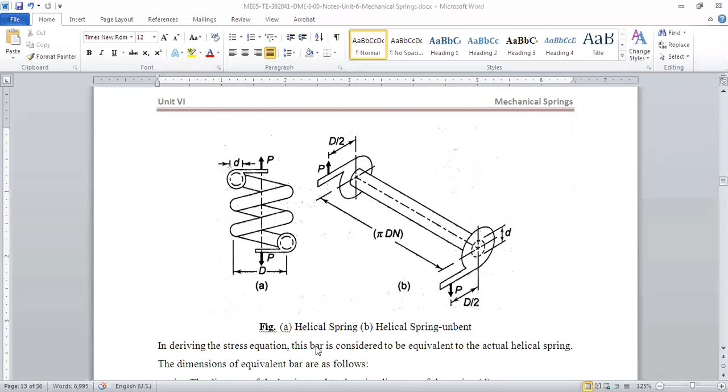So last time I think we left at different lengths, it was kind of explained in a quick manner - I explained basically the lengths of the first spring. Today we'll go through the lengths of springs and also the styles of the end. This is important to understand, and then we'll start with the equation of the spring.

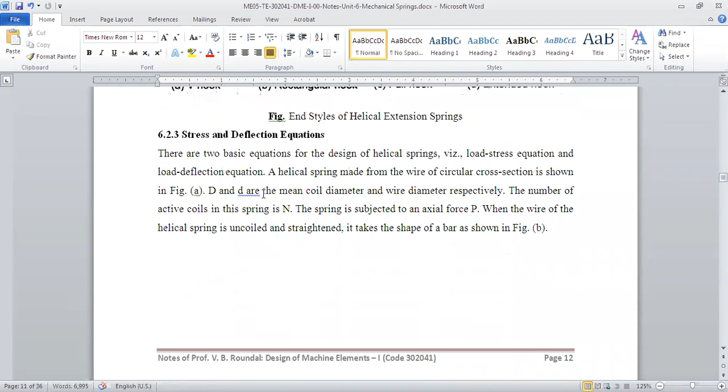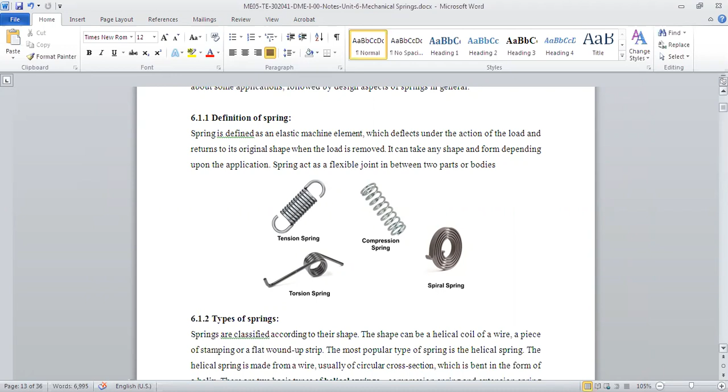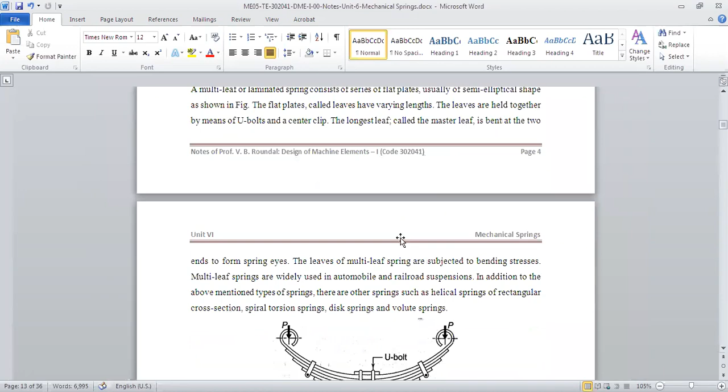As I said, this is the second lecture, and in the last lecture we have gone through what is a spring, why a spring is required, and what are the different types of springs, different types of ends in helical compression and extension springs. They have different purposes, like helical torsion and leaf spring, different functions depending on the applications we have seen for the spring, and some materials used for the spring.

So today - important factor we have learned yesterday - spring index is the ratio of diameter D by d, right?

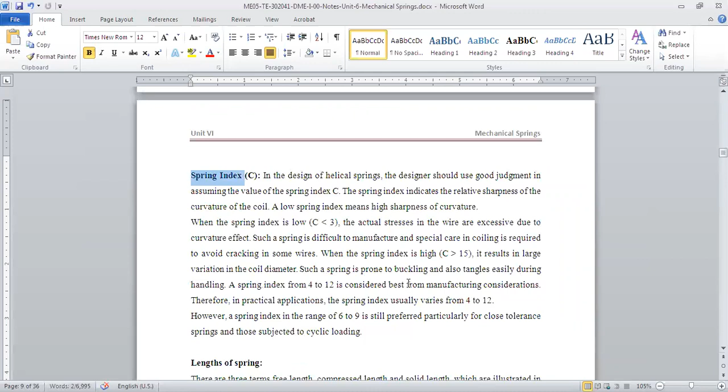Now we'll go through the lengths of the spring. What are the different lengths of the spring? As I said, if we take any spring - like this is a normal helical spring - it may be a tension spring or compression spring, depending on the application.

So if you take the spring, if there is no load on the spring - compressive or tensile, any load - then this length, like the example we are taking is a compression spring, if the load is not there, that length of the spring, total length, is called the free length, right?

When you put a load, the maximum load which you can put on the spring, at that time, the length of the spring after the compression, after the maximum allowable compression, is called the compressed length.

And the length when the spring is in such a form that all the coils are touching each other - so if you put any more load, then the load will not be taken by the spring in a torsion form, but it is taken in a direct compressive way, like it will be like a solid kind of cylinder, and the load will be taken by the coils as a direct load. So this solid length is basically when all the coils are touching.

So if you look closely at these different lengths, the solid length is basically: if d is the diameter of the wire, then diameter of the wire into number of coils will give you your solid length. So this gives you: nt is the number of coils, d is the diameter of the wire.

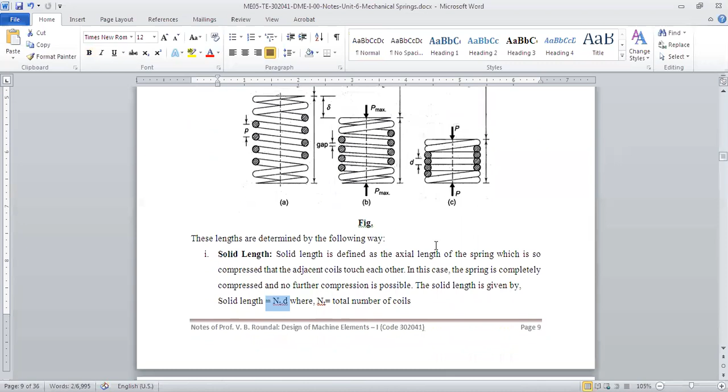Now compressed length means when there is a maximum allowable load, so maximum allowable deflection is there - delta. So solid length plus total gap will give you the compressed length. So basically free length minus delta. So what is this delta? Delta is the maximum allowable deflection.

So if we know this delta, then we can find out - basically what we are trying to say here is that each and every coil must have some kind of gap in between. Why? Because if the coils touch each other, the load will be taken directly by the coil in a direct way, and we do not want that. We want the spring to take the load, right?

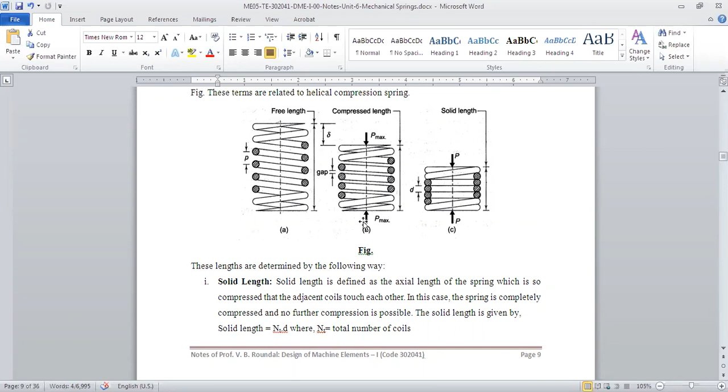So because of that, what is the gap? Total gap is basically nt minus 1 into the gap between adjacent coils. So if the gap between adjacent coils is x, then total gap is x into nt minus 1. Now why minus 1? Because there are top and bottom coils, there will be only one gap, right? So nt minus 1 into gap between adjacent coil will be the total gap.

Now, free length minus this delta will give you the compressed length. Okay, or you can say this is solid length plus gap between each coil, multiplied by nt minus 1. So this is the total gap. So solid length plus total gap will give you the compressed length, and compressed length plus delta will give you the free length.

Free length is equal to compressed length plus delta, so it is solid length plus total gap plus delta, right? This is solid length plus total gap we calculated - gap between two adjacent coils multiplied by nt minus 1, plus delta, will give you the free length.

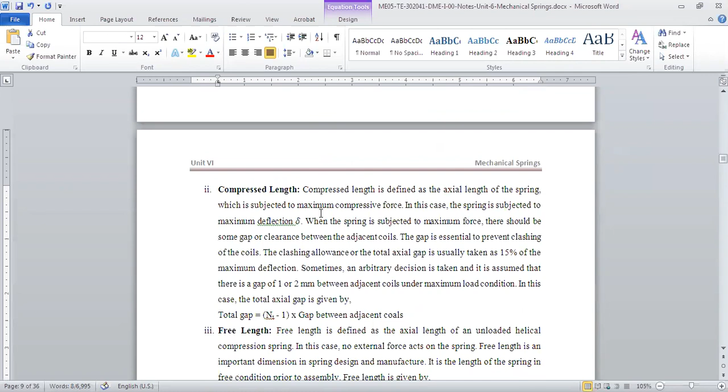Now what is the pitch? Pitch, like in threads, is the distance between two successive or two adjacent coils. So if we know the free length, when the coil is not having any load, that length upon nt minus 1. Again, why are we taking nt minus 1? Just hold on.

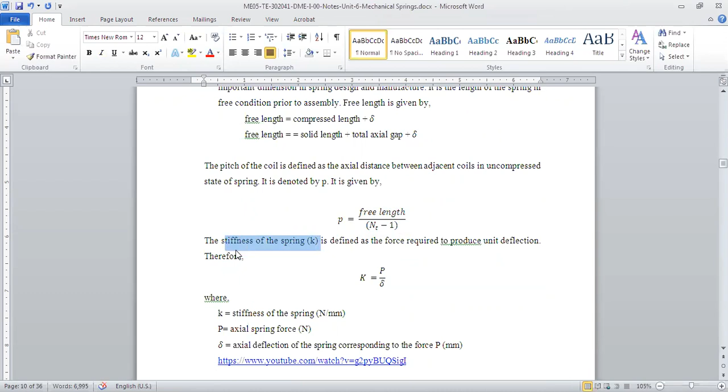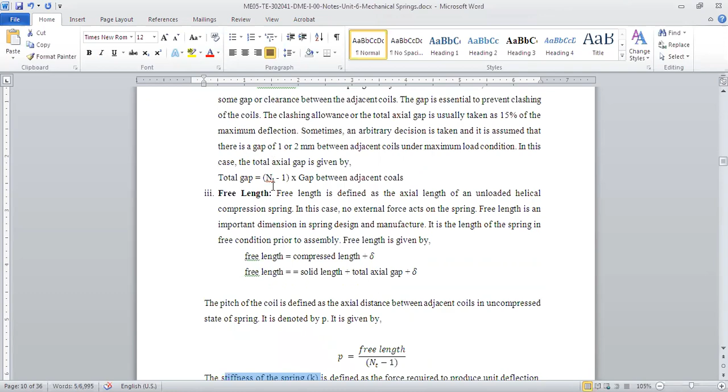Now an important characteristic of a spring is called stiffness of the spring. This is the most important characteristic. What is stiffness? When we put a load on a spring, if the load is P, and because of that load the deflection is delta. So if you take this spring and put some load, it will be deflected. If you put more load, it will be more deflected.

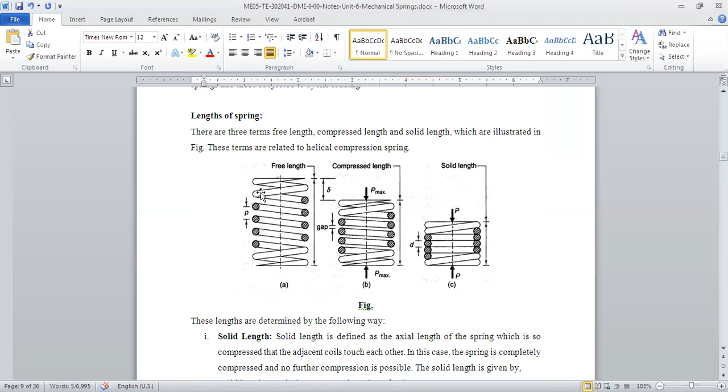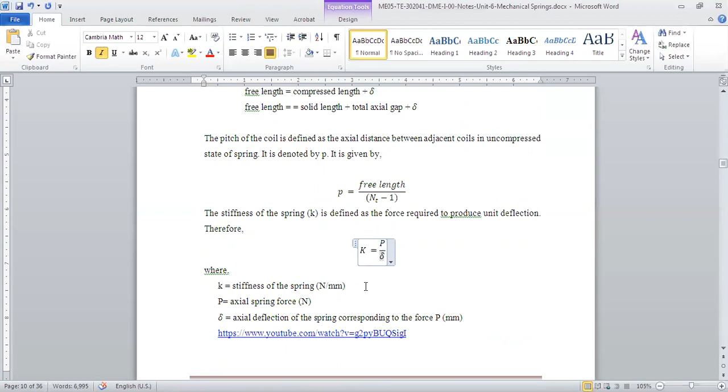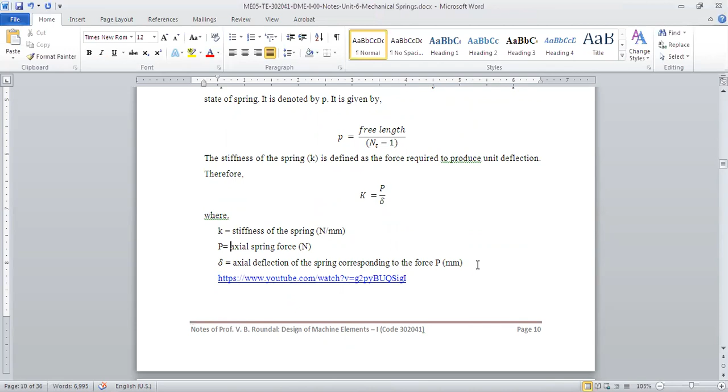So for a spring, this deflection is proportional to the load, or load is proportional to deflection, and that constant of proportionality is called stiffness. So stiffness is equal to load upon deflection. If P is the load in Newtons and deflection is in mm, then Newton per mm is the stiffness. So stiffness is when we put load on a spring, it gets deflected, and the ratio of load upon deflection is called stiffness of the spring.

There are many names for this which we should know, because in different places different names are used for stiffness. Stiffness is basically how stiff the spring is, or what kind of deflection there will be if we put a load. The different names are rate of spring, gradient of spring, scale of spring, or simply spring constant. So these are different names for stiffness of the spring: spring constant, scale of spring, gradient of spring, or rate of spring. Stiffness of the spring is the slope of load and deflection, that's why it is also called gradient. So load upon deflection, that ratio is called stiffness.

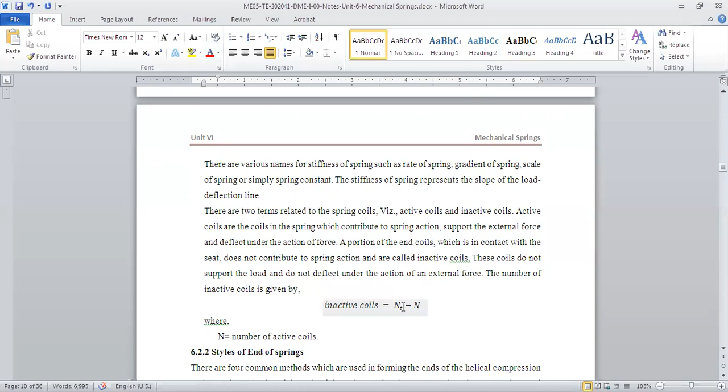Now another important thing is active coils and inactive coils. The coil which is touching the external force will not have any deflection. That's why we have total active coils and inactive coils, which are in contact with the seat or in contact with force. So active coils is equal to total coils minus inactive coils, that will be the total number of active coils, and total coils minus active coils will be the inactive coils. I just wanted you to have a better feel of this rate of the spring or stiffness.

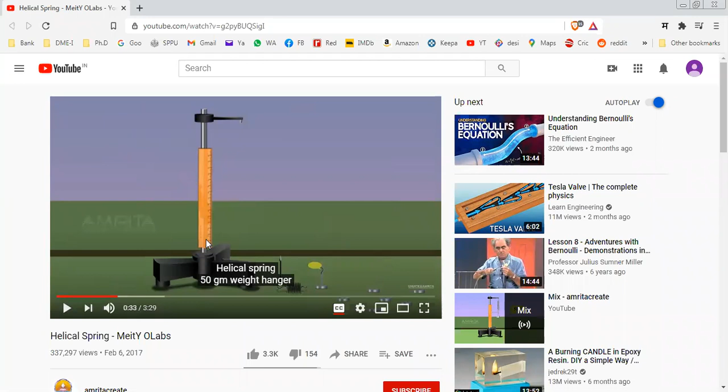Materials required: we will be using a stand. Basically, why do we need a stand to hold the spring. Then we'll use a scale, which will give you the deflection of the spring. We'll need a spring, and we need some weights.

So this is the kind of setup. The spring is there, and when there is no load on the spring, it is basically hanging free. This is a tension spring. So there is no load, and the deflection is basically zero in this no-load case.

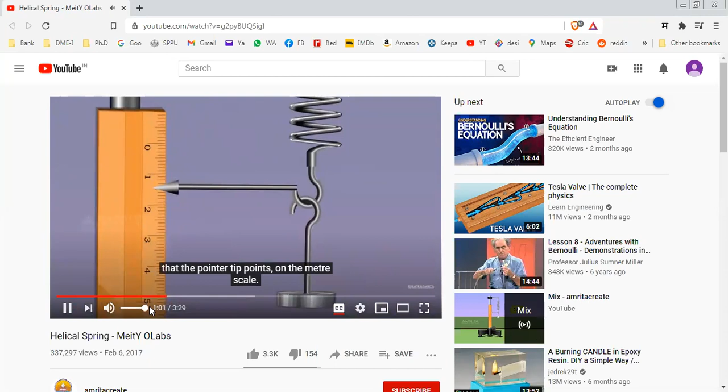Now, the more weights you put, the spring extends. It is basically going to have a deflection reading, with the pointer tip pointing on the meter scale. Record the reading on the scale in a tabular column. So now they are recording for each mass or load. Mass is in kg, load is in Newton, multiplied by 9.81, and we are going to take a reading of the deflection.

We are going to put more and more loads, like 50 grams, and record the readings in a tabular column. What they did is they put different masses, and for each mass, they find out the load by multiplying by 9.81, and find out the deflection.

See, the scale moves upwards as you record the reading. Again, the same thing can be done while unloading, which means taking out the load. So what they found out is the deflection while loading and while unloading, and they took the average. This will give you the approximately correct value produced by the spring for each load.

So now we have found out, for each load, what is the deflection or extension from zero. And if you see closely, for each load, the deflection is increasing, and that's the value on the y-axis.

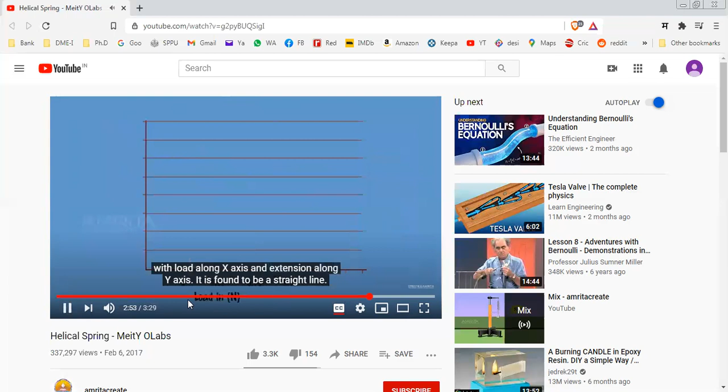Now plot a graph, and the spring constant is calculated. Spring constant is basically your load upon deflection. So if you take a load of 0.49 divided by 0.014, it will come to 35. So for each load, the more load you put, it will have a proportional extension. Are you getting it? So the spring constant comes to 35 Newton per meter.

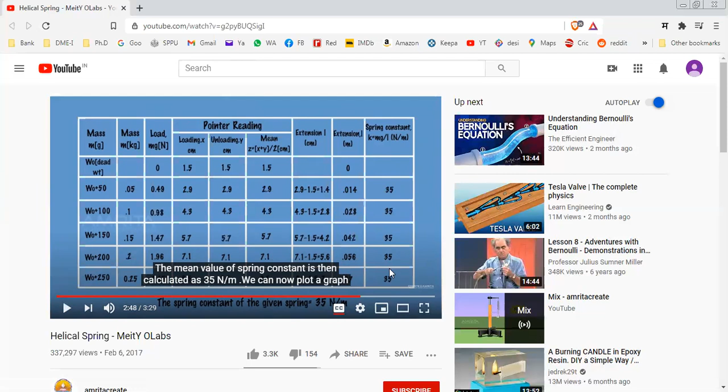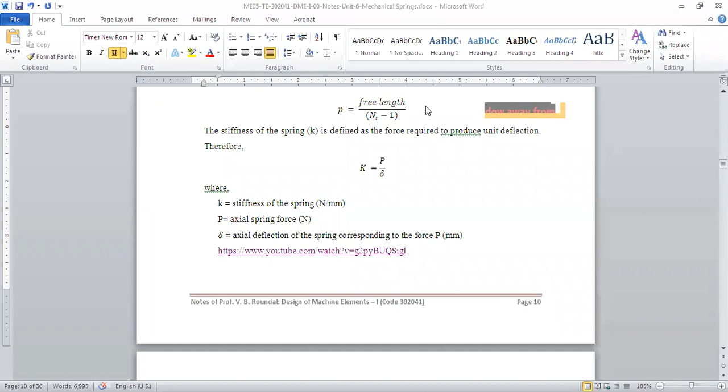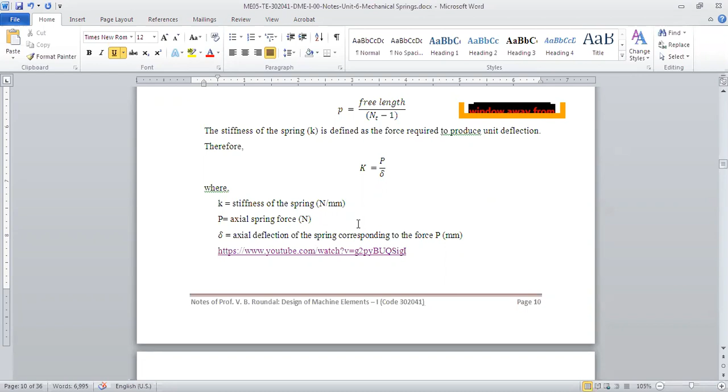So are you getting it? This is what the spring constant is all about. Let me go back to my shared Word document. So are you clear now on what spring constant, rate of spring, or stiffness of spring is? Stiffness of spring is the load upon deflection. The more load you put on the spring, the more deflection you'll have, and that corresponding ratio of load upon deflection is called the spring constant, K, the stiffness of the spring.

So I will move ahead to the next topic, and that topic is styles of the ends of the spring. This is important to understand - what are the different styles of ends of a spring, meaning how the end can be.

The end can be made in different ways. These are four examples. One is, if you simply take the coils and do not make this end straight, it is as it is - simply cut the wire at the ends. This is called plain ends.

Now in the second one, the same thing is there, but with a grinder you grind it to make it horizontal. So that is the second case, where the ends are plain but ground. This means, if we put a load here, it will have a point contact, but in the second case it will have a surface contact. So the first and second are almost the same; the only difference in the second case is the ends are ground to make it a plain surface.

Now in the third case, the end is not inclined. We bend the end of the spring and make it horizontal. This third case will have surface contact with the end, and it will be able to take the load in a better way. The last case is a modification of case number 3, where we are grinding the ends to make a proper better surface contact.

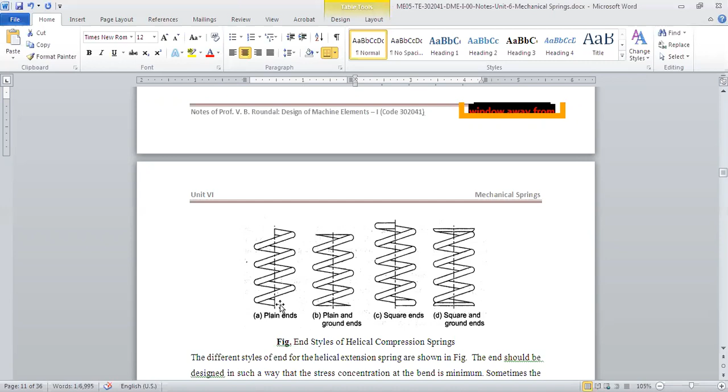Okay, so these are the different types of ends. Now how do we take the total number of active coils? If it is plain ends, then start and end will have equal distribution of the load, so it will take total coils as the total number of active coils.

So whatever coils are there in total, say if there are 9 coils, we'll take total number of active turns as 9 only. Now in case of plain ends, if you consider two ends, half of the coil will not be active. So that time we'll take nt minus half as the active coils for plain ends with grinding.

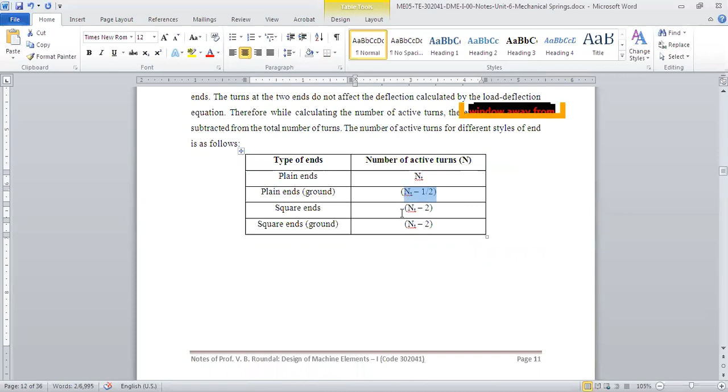But now with square ends, the first and last, top and bottom coil will be completely in surface contact with the object, and because of that it will not have any kind of active participation in the spring action.

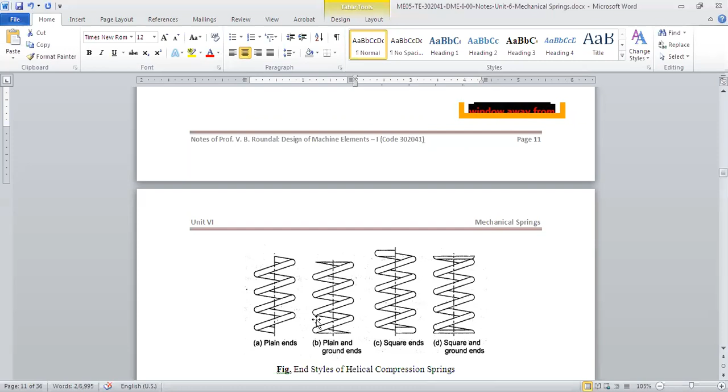So because of that, we will reduce those two. The total number of active coils will take nt minus 2 in case of square ends and square and ground ends. So in the examples or problems, you will be given what kind of ends are there.

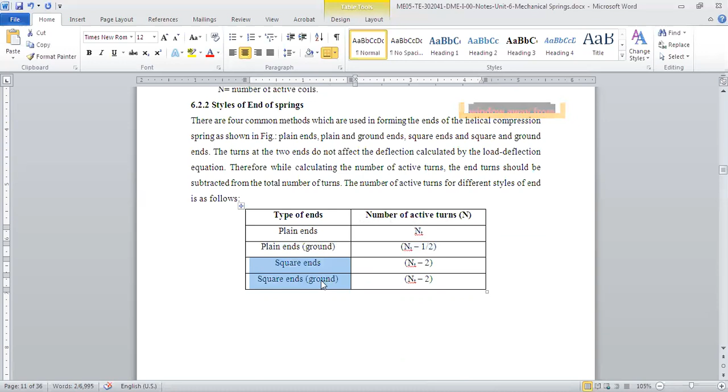So if it is plain ends, take total number of coils as equal to total number of active coils. For plain ends which are grounded, nt minus 1 half is equal to your total number of active coils. And for square ends which may be normal or ground ends, it will take nt minus 2 as your total number of active coils.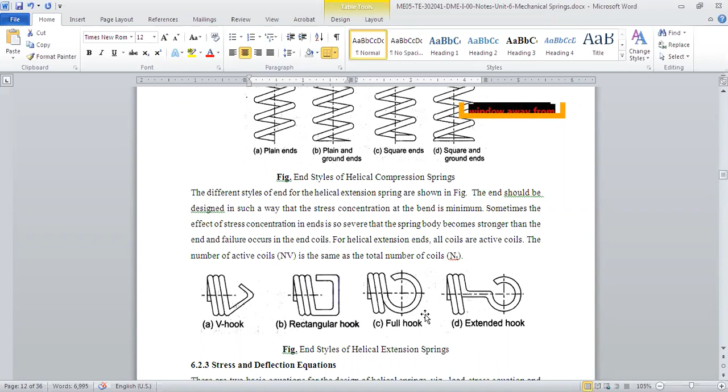So these are how the ends will look like in case of helical extension spring, and these are the ends which we will fix in a helical compression spring. Okay, clear? So now we will go ahead with finding out the stresses and deflection of a helical spring.

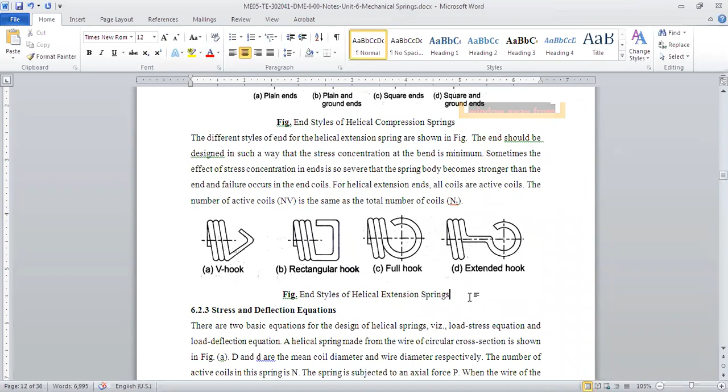But till now is it clear, you guys? Everything is clear? I will quickly go through the basic concepts. You guys have any doubt? Kindly ask me in the chat.

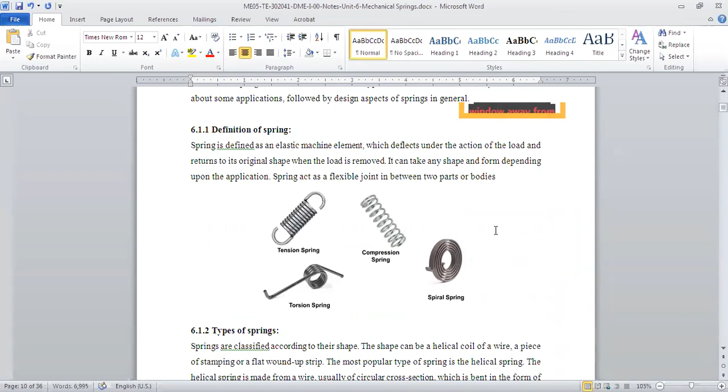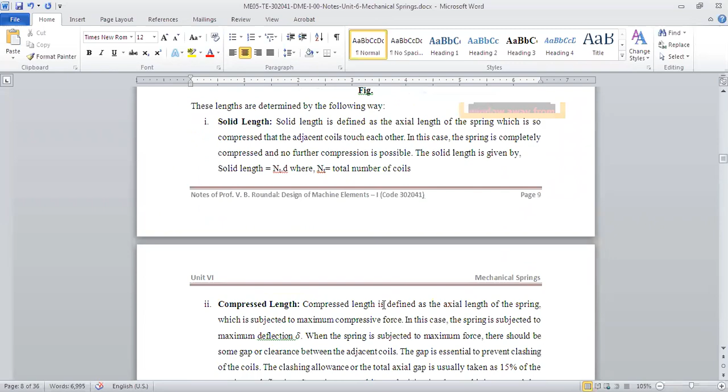So we have seen different types of springs, and functions of the springs, materials of the spring. We have seen some basic characteristics of the spring or terminologies - inside, outside diameter, or diameter of the wire. We have seen spring index, capital D upon small d, ratio of coil diameter upon wire diameter. We have seen lengths of the springs, free length, compressed length, and solid length.

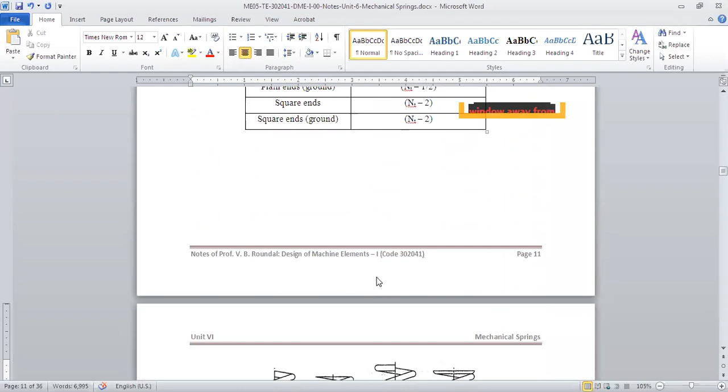Then we have seen stiffness of the spring, a very important characteristic of the spring, and the styles of the ends. So if we have this basic knowledge, we can go ahead with the design of the spring. So you guys want me to go ahead with the design of the spring? Okay, you guys are all following me whatever I'm saying.

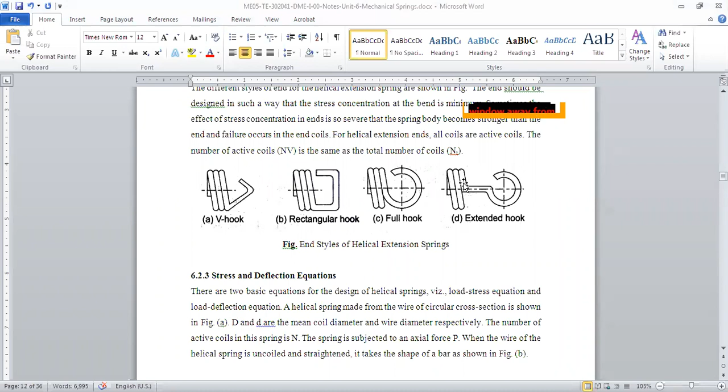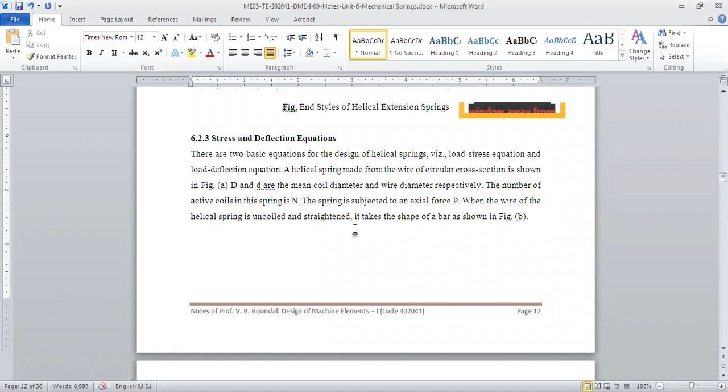So if that is the case, then I will simply go ahead with the deflection of the spring - how to calculate stresses and deflection of the spring. Now this is a very critical part where you need to understand how springs work. If we can understand this, then it will be very easy for you to follow the design. Design is very simple, it is not very high-fi or any complicated thing.

Okay, it might be helical compression or tension spring, doesn't matter. But the stresses in the coil, as we have talked about it, will not be direct tensile or direct compressive stresses. The stresses in the coil will be a different kind.

Now, how these stresses arise: as I said, there will be a torsion or twisting of the spring coil, and because of that, there will be shear because of the twisting moment. Now, how does this happen?

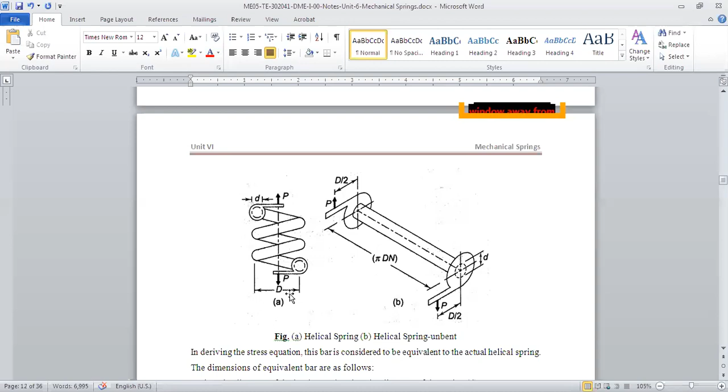We are putting a load P at the end. This load is acting at some distance from this wire. If D is the diameter of the coil, then it is acting at a distance D by 2. Look at the first diagram, A: the load P is acting at the center of the coil, at a distance D by 2 from the center of the wire.

Because of that, it will have a moment, a twisting moment. What is the value of this twisting moment? P into D by 2. That will be the twisting moment.

And because of that, what happens? If you take a straight rod and try to put a load on it, that rod will undergo compression, or if you pull it, tension or compression, but that will be a direct load P upon area.

But this is not the case here. We are not putting direct tensile or compressive stresses on the rod. What we are doing is trying to twist it. So how do we calculate that?

Try to unwind this coil and make it a rod. If we unwind this coil and make it a simple plain rod, it will look like diagram B, where P is the load applied at a distance D by 2. Because of that, there will be a moment, or torque, P into D by 2. The same thing is applicable on the other side, and because of that, this rod will be having a twisting action.

We will try to rotate it, meaning both ends will have opposite kinds of torque. So it will have a kind of twist, or we call it phi. We'll try to twist it, right? So because of this twisting, we will have shear.

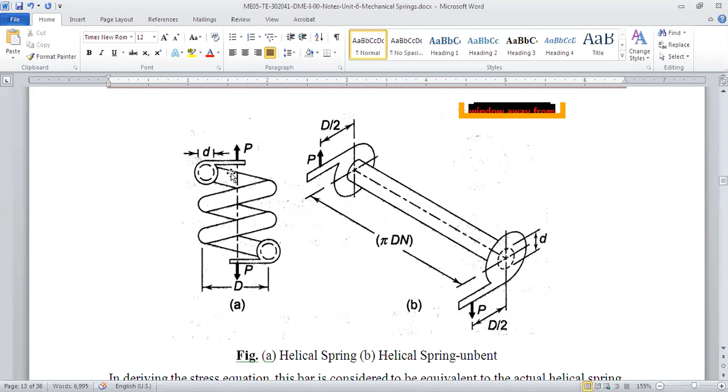So now we know the total length of the wire is pi d n, and we know the moment acting on that wire is P into D by 2. Then we can go ahead with the design of the coil.

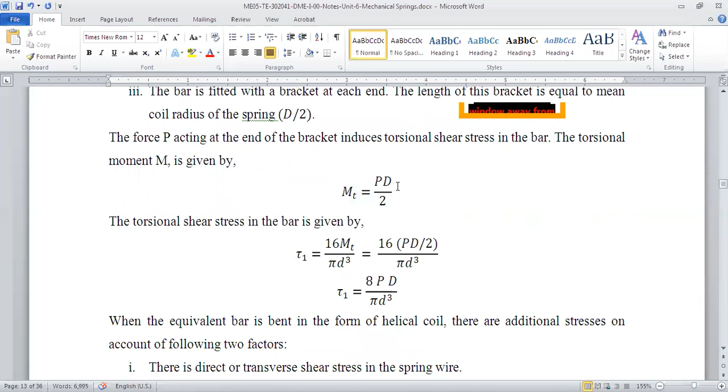Now, how is this design done? Now, moment is PD by 2, as we have seen. Now, if we use a torsion equation: M upon J is equal to G theta by L. What is the equation? T upon J is equal to tau upon R equal to G theta by L.

You must be remembering this equation, or if you don't know, then you should know this equation. We have got this equation by using MT upon J is equal to tau by R is equal to G theta by L, that equation.

So shear stress tau is given by 16 MT upon pi d cube. Now we know MT is PD by 2, right? So we will get shear stress in the coil as 8PD upon pi d cube. So we know that the shear stress can be calculated by using torsion equation, and we get shear stress in a coil as 8PD upon pi d cube. So now we know shear stress.

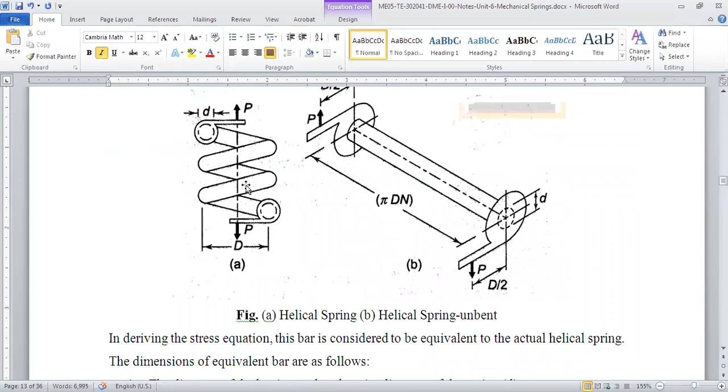Now obviously, if you know this kind of load are there, this is a shear stress because of the twisting or the torsion, but also because of the direct load, there will be shear too. So now we have to calculate, there are two stresses: the stress because of the shear.

Now this shear will be zero at the center, maximum at the outside. Direct shear will be uniform throughout. So if you combine these two, the resultant shear will be like this.

Okay, again I will repeat this. If A will give you the shear because of the twisting, it will be maximum at the extreme fiber, zero at the center. The direct shear will be equal at all places from extreme fiber to the inner fiber. And if we combine these two directly, because both of them are shear stresses, we can directly add them.

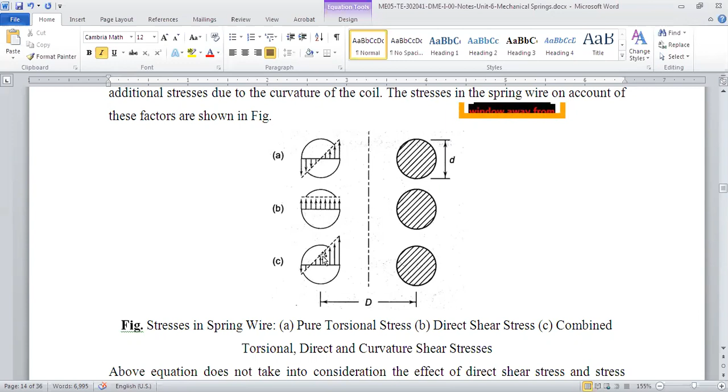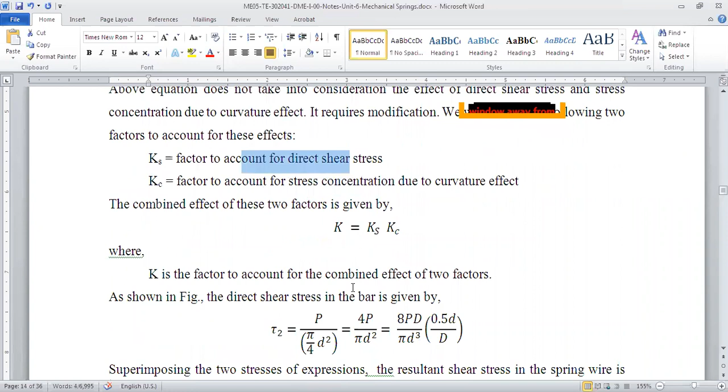And because of that, now it is having a circular shape, right? So there is obviously stress concentration, and the factor is called Kc. So the multiplication of this factor gives us K, the factor for combined effect of the two factors: stress concentration factor and direct shear factor. So because of that, we use a combination of these two as a factor called K.

Now what is direct shear? Direct shear is P upon area, load upon area, right? What is the area of the coil? Pi by 4 d square. So direct shear will be 4P upon pi d square, right?

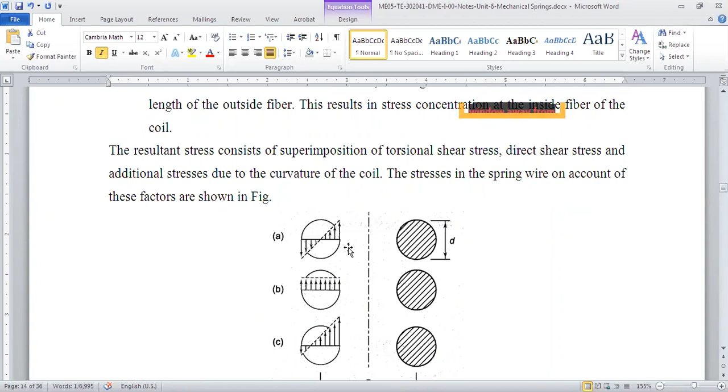So now the first stress is shear stress because of the torsion or twisting, that is 8PD upon pi d cube, right? We have seen that. And because of the direct shear, it is 4P upon pi d square. Now we want to make, or we want to have this kind of factor, 8PD upon pi d cube.

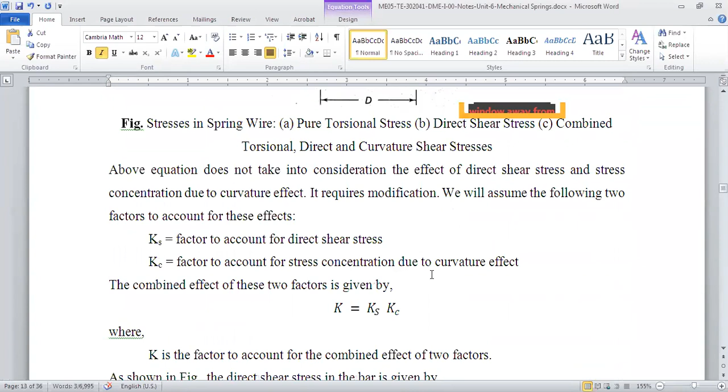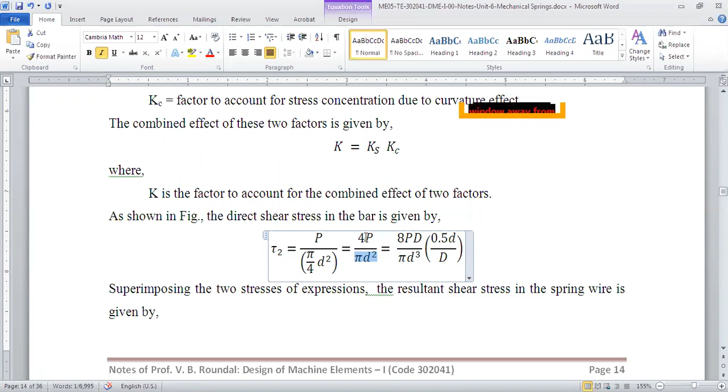So what we can do, we can say this is 8P multiplied by d divided by d. So we'll get 8PD, and now here also pi d square, so we'll make it pi d cube by multiplying by d. But since it is 4, to make it 8, we will multiply by 0.5. So whatever you see in the bracket, it is just a multiplying factor to this 4P upon pi d square to make it 8PD upon pi d cube.

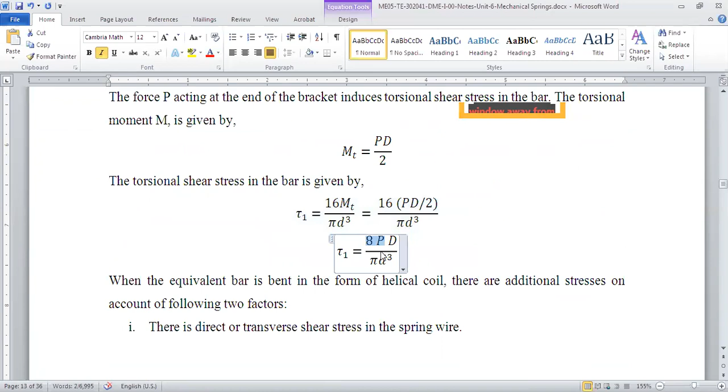Now why do we want to make it 8PD upon pi d cube? Because the twist shear because of the twisting is 8PD upon pi d cube, and we want to combine these two, so we want something in common. So what will we have in common? 8PD upon pi d cube. So we'll take that and multiply by 0.5 to make 8 into 4, multiply by d to make pi d square into pi d cube, and divide by d to cancel this d, right?

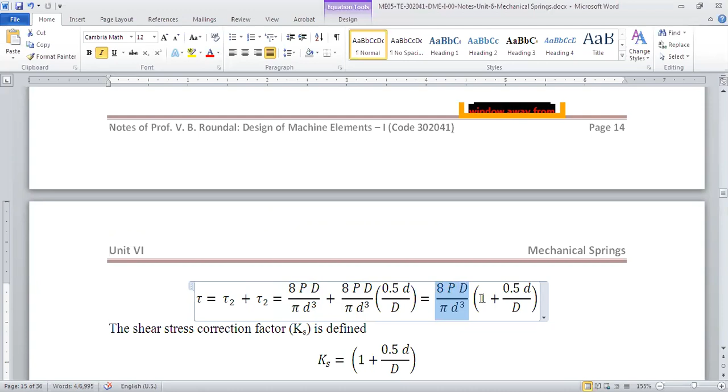So we get 8PD upon pi d cube, and this 0.5 d upon D will be your multiplying factor. Now, because both of them are shear stresses, we can combine the torsion shear stress and direct shear stress to get total stress. The total shear stress is 8PD upon pi d cube, this is because of twisting, plus 8PD upon pi d cube into 0.5 d upon D. So we'll take it out, and in bracket we'll have 1 plus 0.5 upon 0.5 d upon D.

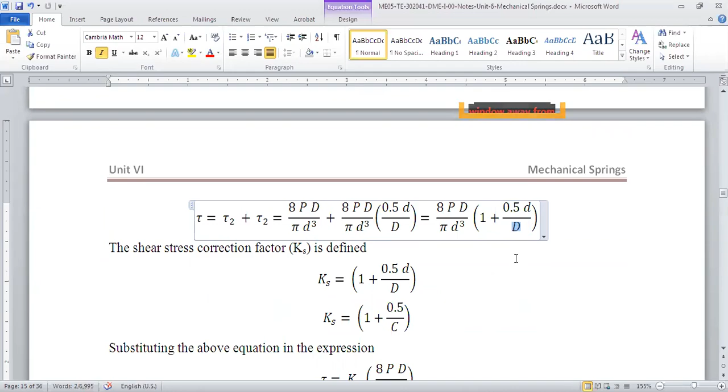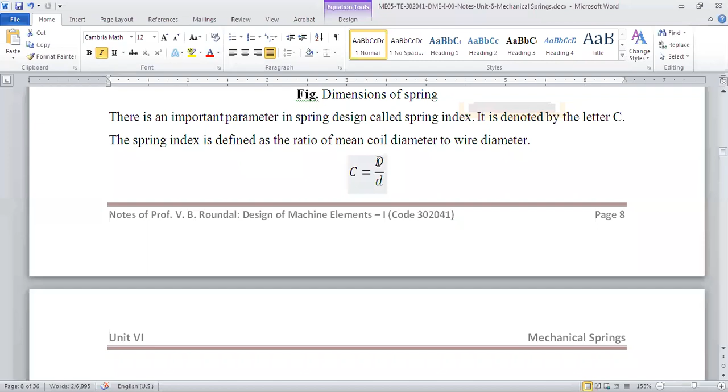Now we also know that capital D upon small d is the spring index, right? We have seen here, ratio of spring index C is coil diameter capital D upon small d, coil diameter upon wire diameter. So if we replace that here, we get it is 1 plus 0.5 upon C. This Ks is the factor due to direct shear, as we have seen here.

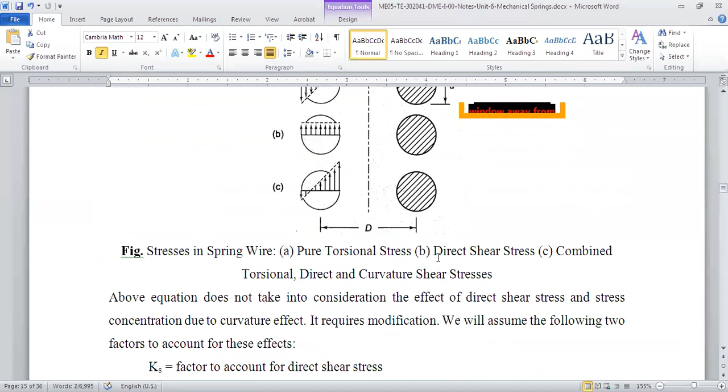Now also there is a factor due to curvature, right? So tau is equal to K into this, because of the curvature we take this K is equal to Ks into Kc. So K into 8PD upon pi d cube. Now this K is called the Wahl factor, and the Wahl factor K is given by 4C minus 1 upon 4C minus 4 plus 0.615 upon C. Now the derivation of this equation is not in syllabus for you guys, so we have to simply remember it.

What is Wahl factor? It is a factor K which we use to multiply 8PD upon pi d cube to get shear stress in the spring. What is this value of K? K is equal to 4C minus 1, 4C minus 4 plus 0.615 upon C. C is spring index, capital D upon small d, diameter of the coil upon diameter of the wire. Use that C in this equation, 4C minus 1 upon 4C minus 4 plus 0.615 upon C. We will get K, and use this K to multiply by 8PD upon pi d cube to get shear stress in the spring.

Okay, so that is how we will calculate shear stress. Now we will be given allowable stress for spring, right? Then that allowable stress multiplied by 0.5 will be your allowable shear stress, and then we equate that to K into 8PD upon pi d cube, where K is the Wahl factor given by this equation. And with this, if we know the load and the coil diameter, then we can calculate the wire diameter.

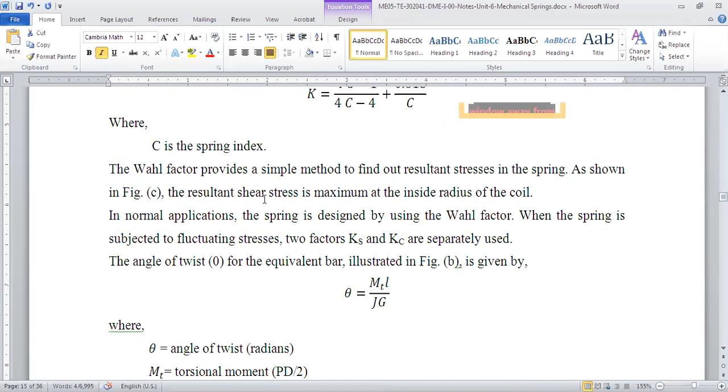So you guys are following whatever we are saying? So now the last part of this design of this normal or helical spring is finding out the deflection of the spring, or the angle of twist. How much your wire will twist.

Now this again, we'll use the same formula of torsion. Mt upon J is equal to G theta by L. I told you we are going to use both parts of this equation. Mt upon J is equal to tau upon R is equal to G theta upon L. That is the twisting or torsion equation. So theta is equal to MtL upon JG.

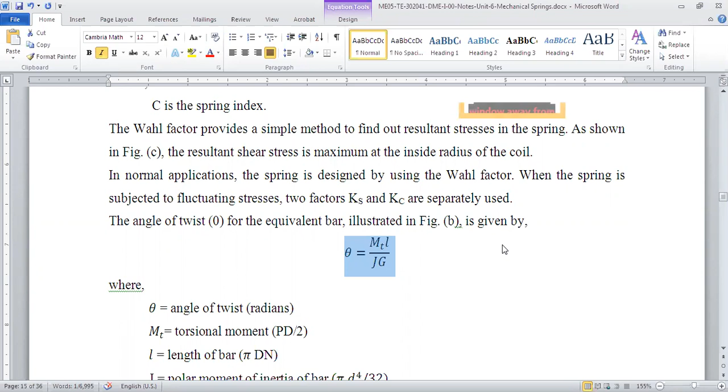Now Mt upon J is equal to G theta by L, right? So Mt we know is twisting moment PD by 2. L is the length of the bar, pi Dn, and J is pi by 32 d raised to 4, and G is your modulus of rigidity. So we know all these different components of this equation. Theta is equal to MtL upon GJ. So we'll put in all those values.

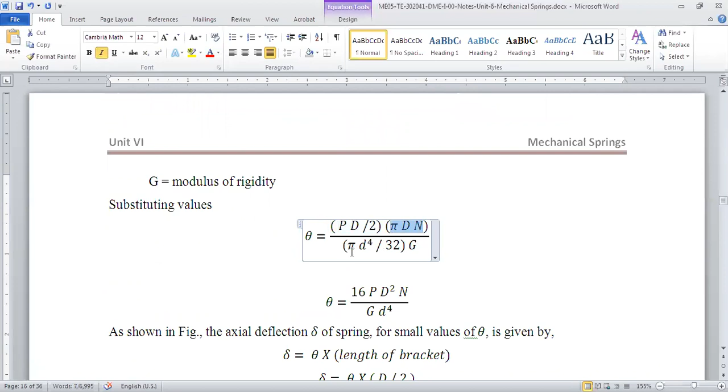This Mt is PD by 2. Pi Dn is your length of the total wire. Pi by 32 d raised to 4 will be your J, polar moment of inertia. So we get 16 PD square N upon G d raised to 4. This is the twist at the end of the spring. Twist means how much it will be rotated.

Now we have to find out the deflection delta. Now delta is equal to what? If you see here, delta is equal to the distance of this load from the center of the wire, multiplied by angle theta. We have just calculated theta as 16 PD square n upon G d raised to 4. Multiply that with this length. What is the length? D by 2. So theta into D by 2 will be your deflection of the spring. So delta is equal to this, again multiplied by D by 2.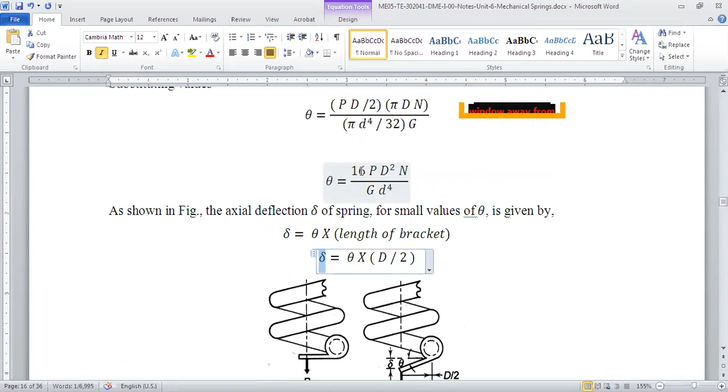So this is PD. This 16 will become, because it is divided by 2, so 16 will become 8. 8PD cube n upon GD raised to 4. So deflection of a spring is given by equation 8PD cube n upon GD raised to 4.

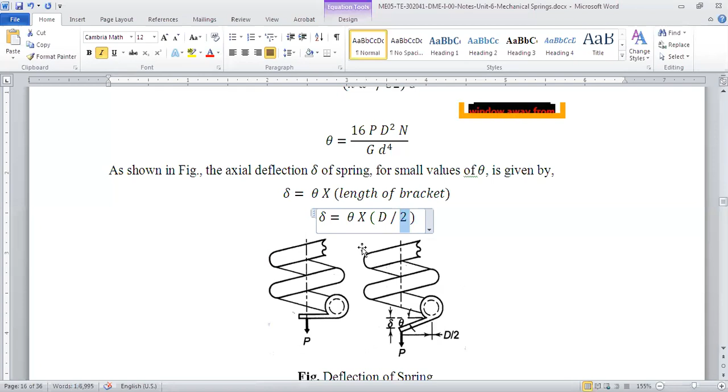How do we calculate that? Delta is equal to theta into R. R is the distance of the load from the center of the coil, so it is D by 2. Theta is 16PD square n upon GD raised to 4. We calculate that by torsion equation, right?

So now we know deflection of a spring is given by equation 8PD cube n upon GD raised to 4. Here P is the load, D is the diameter of the coil, n is number of coils, G is modulus of rigidity, and small d is the diameter of the wire.

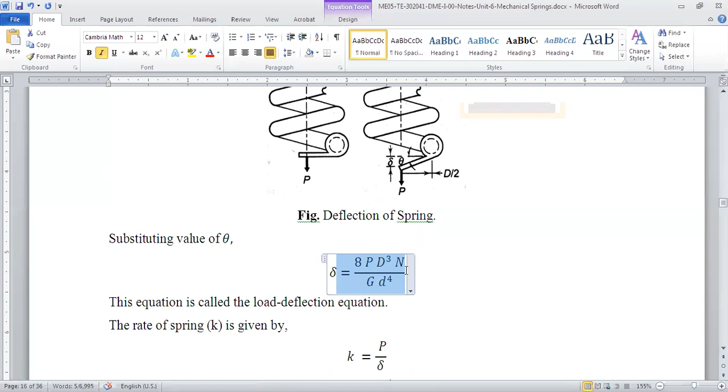Now since we know P, we can find out the rate of the spring or the stiffness of the spring as P upon delta. We just know that load upon deflection is your stiffness of the spring. How stiff is the spring?

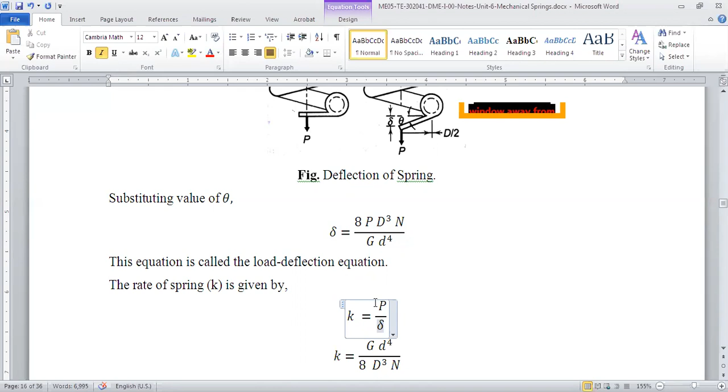So we put this value of delta here, and P will be cancelled, and we will get GD raised to 4 upon 8D cube n. This is the stiffness of the spring, right? GD raised to 4 upon 8D cube n.

So stiffness of the spring is given by formula G, modulus of rigidity, D raised to 4, diameter of the wire raised to 4, upon 8D cube n. D is the diameter of the coil, n is number of coils.

Okay, right. Now with this equation, we will get to know that G, the modulus of rigidity of the wire, is fixed. D is the diameter of the coil.

Basically, if you see this equation, it has diameter of the coil and number of coils. So if we know any one of these, or if we know the spring index, we can calculate the diameter of the wire. If we know the diameter of the wire, we can calculate the radius of the coil and all that.

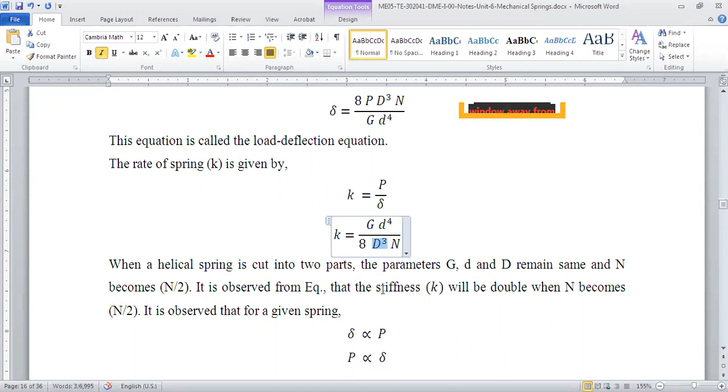So we can do all these calculations, and we can find out different dimensions of the spring. Now with this, we know that delta is proportional to P, or P is proportional to delta, right? So actually, again, this E is given by area of a triangle.

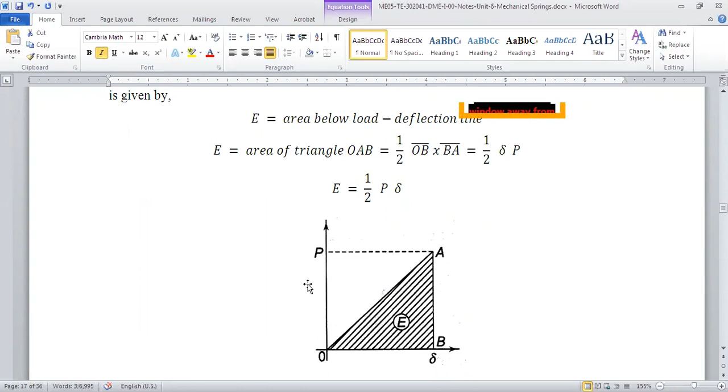If we put this load upon deflection, this is called load deflection. So the more load we are going to put, the more deflection we will have, because it is directly proportional. So this E is basically energy stored in the spring.

Now what is energy? Load into distance into half. So half into the area below this diagram, or the area below this line, is called the energy stored in the spring. That is given by half into P into delta. So P into delta, load into deflection, multiplied by half, will be the energy stored in the spring.

Okay, so this is how we will do the design of the spring. Next time we will try to get an example or possible series and parallel connections.

Now there are few conceptual parts also left. So if possible, we'll take a numerical as well as we'll try to go through the next lecture on series and parallel connections. Now in springs we can put two springs in parallel, or in series, one after another.

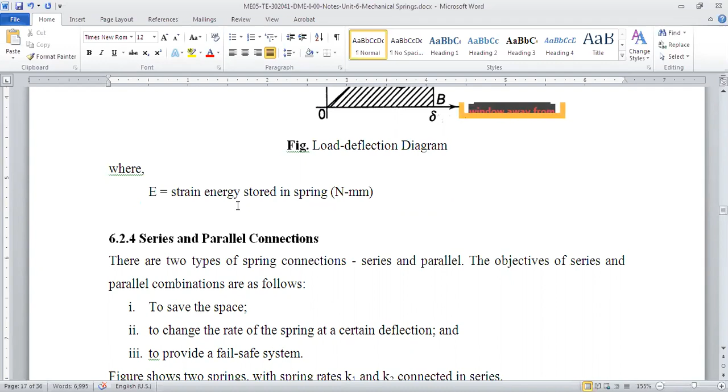We can put two springs, and for this now we have to calculate the ultimate or the resultant stiffness. We'll see now how to do that in the next lecture. Okay, but is it clear now what is the basic design part?

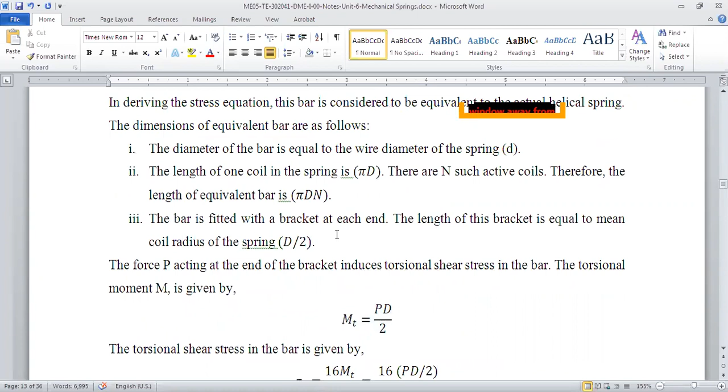Now for the basic design, we must know the spring index. We need to know the stiffness of the spring. We use the torsion equation, but basically the stresses developed in a spring are the shear stresses.

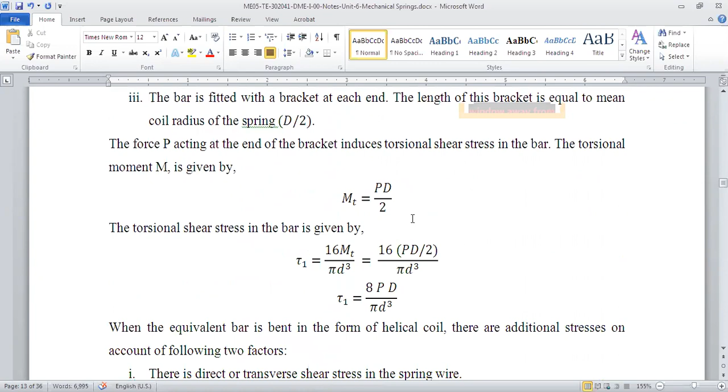Two parts: first is shear stress because of the twisting, and direct shear. Shear stress because of twisting is given by the equation 8PD upon pi d cube, and because of direct shear it is given by 4P upon pi d square.

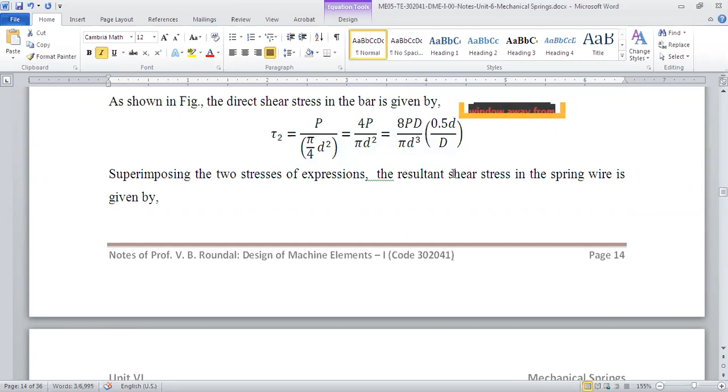So basically it is 8PD upon pi d cube into 0.5D upon D. So we'll get combined total shear stress as 8PD upon pi d cube multiplied by 1 plus 0.5 upon C, right? And that is the total stress.

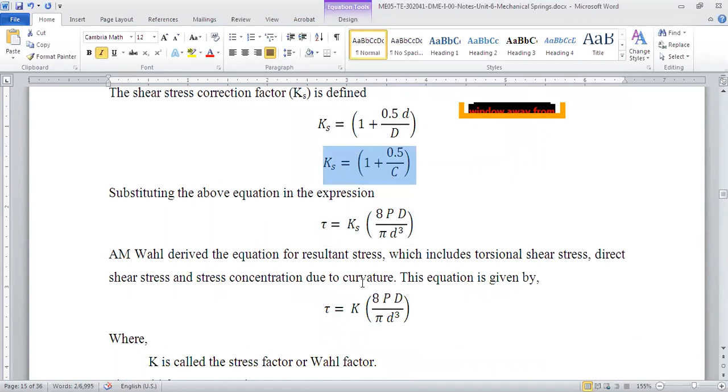So, if we have to consider the stress concentration factor and all that, we'll get tau is equal to K into 8PD upon pi d cube, where K is Wahl's factor, and Wahl's factor is 4C minus 1 upon 4C minus 4, plus 0.615 upon C.